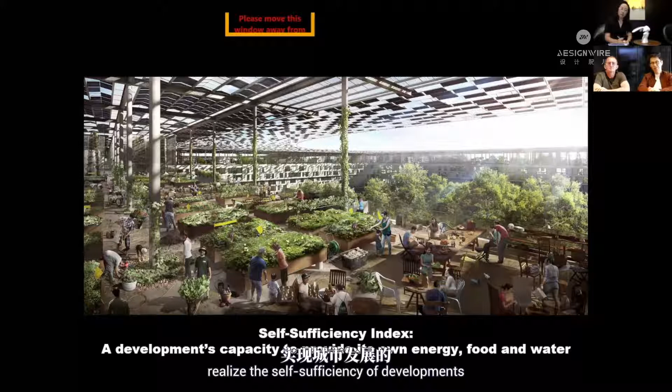And this helps us realize the self-sufficiency of our developments as well as our cities in general.

We have another concept called prototypology, which is to see every building we do as a prototype for a city of the future. We always look at it as a way where it can inform future projects, or how, if it was replicated at scale, we could have system impacts from the way it performs. So the projects we'll show you are kind of prototypes, or a rethink of a particular type of use of a building. We wanted to show this to explain what we mean by prototypes.

The first one is in Bali. It's not in a high density urban environment, but we think it's an interesting one to show our approach to rethinking a problem and reframing it in terms of systems and landscape. It's on the edge of a cliff in Bali, and the big change in this hotel is that we flipped the architecture completely from object to space - a figure ground reversal in terms of what we focus everybody's attention and experience on. You can see it as a series of outdoor spaces and landscape, just framed by the architecture.

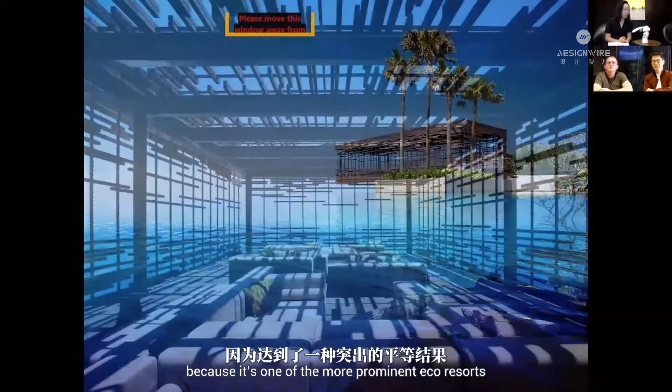As a hospitality project, we were interested in making it sustainable. When we got this project, we discussed with our clients and said the future of hospitality and luxury must be equated with sustainability. This project, from day one when it was finished, became the darling of sustainability, and it got very good publicity because it's one of the more prominent eco resorts.

It uses all local materials and recycled wood. The wood is old telephone poles and railway sleepers. The stone is all from Bali or from Java.

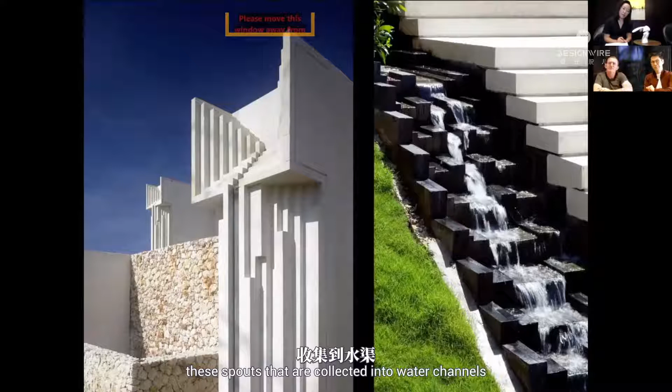But this being a very dry area in Bali, water was a crucial element in the design. We wanted to harvest and recycle as much water as possible to reuse in the development. So this is a rain garden, for instance, which stores water and then slowly releases it. These are details around the site where we celebrated the journey of water from the roof down these spouts that are collected into water channels, and then go into the recycling ponds.

This is the hotel room. You can see that as a room, it's actually really a garden, and we have very minimal separation between indoor and outdoor. But what is nice about this room type is that we encourage people to use the room in a naturally ventilated condition.

So when the hotel was open, the operators actually asked the patrons and visitors if they would like to keep the room open in the daytime, but they would only close it at night for air conditioning when they sleep. Most guests opted to have their rooms naturally ventilated in the daytime, so you can see the amount of energy savings you would have.

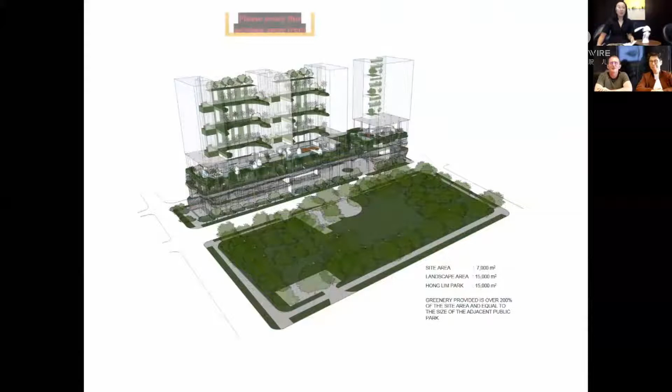It's located in Singapore in the heart of the city, but we were very interested in creating a very green and garden experience, this one being in the CBD.

So this green area that you see in front of the hotel is a piece of land that in 1876, a wealthy Chinese businessman donated as a park for the workers. This is Singapore's first and only private public park.

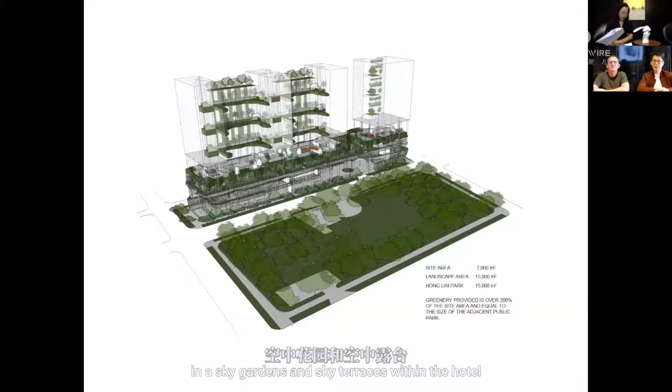When we were asked to do this project, we wanted to match the civic generosity of this philanthropist, so we created the same amount of parks as sky gardens and sky terraces within the hotel. We created over 200% of the site area in gardens within the hotel.

So you see a video clip of it, and it makes very clear that this hotel looks very different in terms of building material and finishes compared to other buildings, because it has quite a bit of integrated landscaping built into the form.

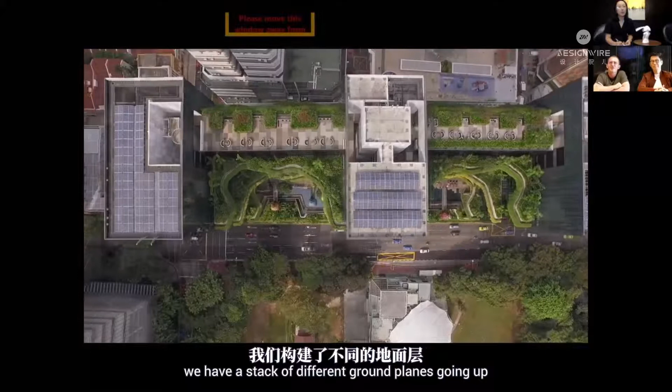The spatial design makes us feel like the building is introducing nature into itself. You can see several of our strategies here: multiple ground levels, a stack of different ground planes going up, and topographical architecture, so the building is more like a landscape than a building. The different parts appear as smaller buildings within the landscape rather than being a single object that you read as one building.

At the same time, this is for us a very high density solution, but also creating high amenity to the users.

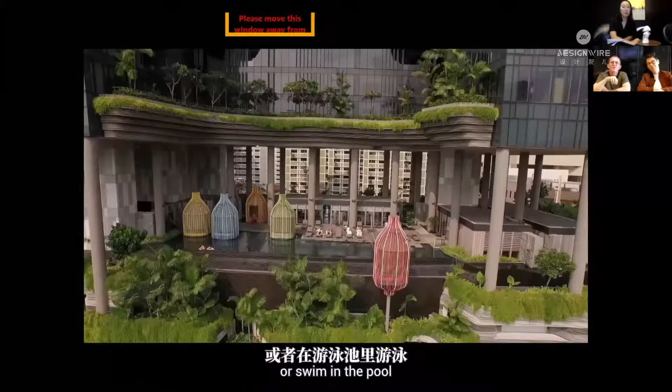I think it gives you really unique experiences in the city. Just sit in one of these pavilions or swim in the pool, you get to enjoy the city in a completely different way. What is interesting is that this building and this hotel has got a lot of attention from social media and from people, I think really because there are very domestic details within the development that people can see and relate to from the street level. So it actually gets photographed a lot.

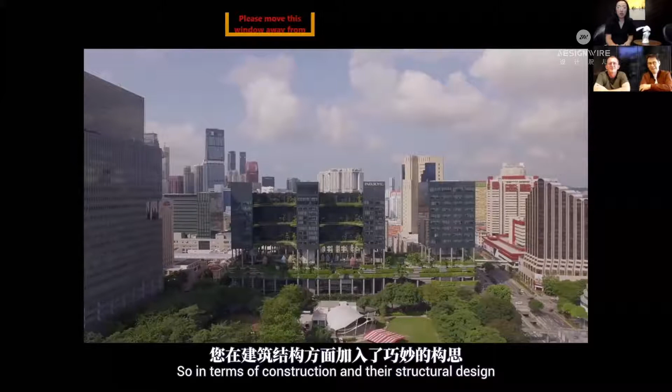So we have a question regarding this project. In terms of construction, the structural design, what is the biggest challenge in this project?

Singapore, we're not an earthquake zone, and compared to China, where you have to make the buildings very geometric and very strong, in Singapore you can be a little looser.

The biggest challenge was probably managing all the different contours of the topographic architecture, because we needed to do it in a way that was fairly buildable. So we came up with a system of regular panels and radius of curves and pieces, so with a few molds you could actually make the entire landscape form. It looks like a very different looking building and difficult to construct, but in reality it wasn't that difficult—it was a fairly straightforward kind of construction.

I think the only challenge was when the building is finished, almost everyone wanted instant gardens and instant landscaping, but it takes something like 6 months to a year for the landscaping to actually feel lush and mature. So the anxiety at the beginning was really how to get it lush and green, so it actually shows off the quality we wanted from the design.

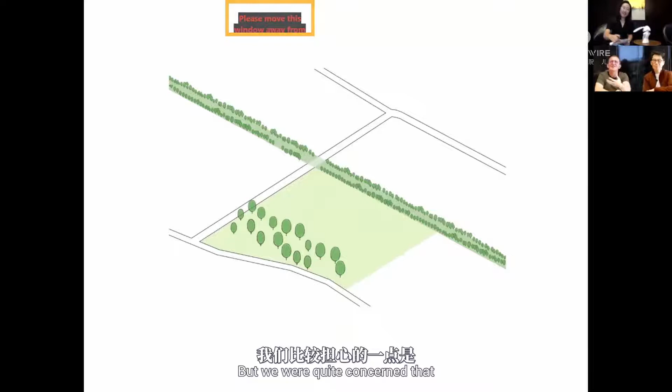The general concept was 960 apartments, which in Singapore is pretty large—maybe in Beijing it may not be that large. But we were quite concerned that we wanted to foster a sense of community, and we felt 960 apartments is too big, you'll never know your neighbours. So we were really keen to break it down, with that idea of a city within a city, or a vertical village.

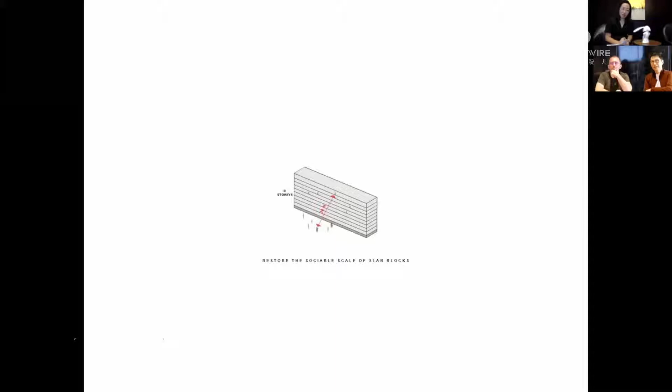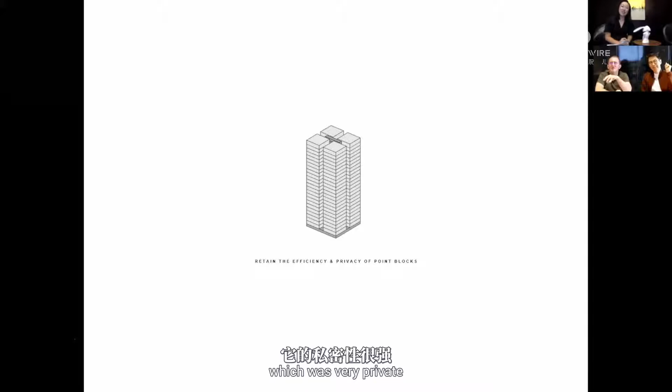The idea was we would take some aspects of old public housing which were seen as very sociable, like the old 11-story or 10-story blocks where you could see the face of your neighbor as they were walking on the ground, or you could hear someone shout from the top floor to the ground floor. The next model in Singapore from maybe the 80s was the point block, which was very private—people liked it, but there was a sense that you no longer knew anyone living in your block.

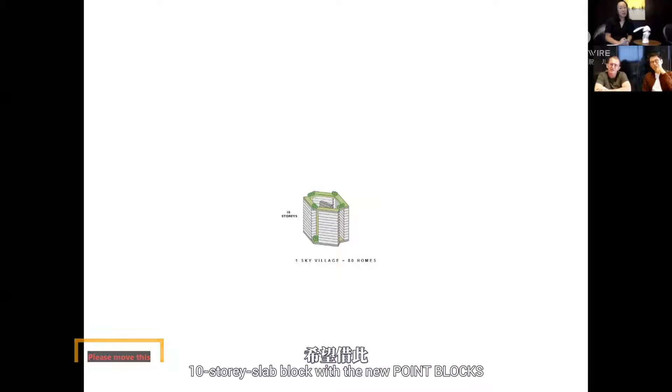At most you only know 4 neighbors within the same floor, so it wasn't such a sociable sort of idea. So we came up with this module, which was a combination of the old 10-story slab block with the new point block. We hope to create the best of sociability as well as privacy with this idea.

We put 80 of them together in one 10-story block, but the important thing was they shared a common volume. So everyone who would come in and out of the lift could look down into a common space, and if they could see their neighbor there, they could wave hello. Their kids could play together there or study there, you could walk your dog there. So it became like a village with a town square.

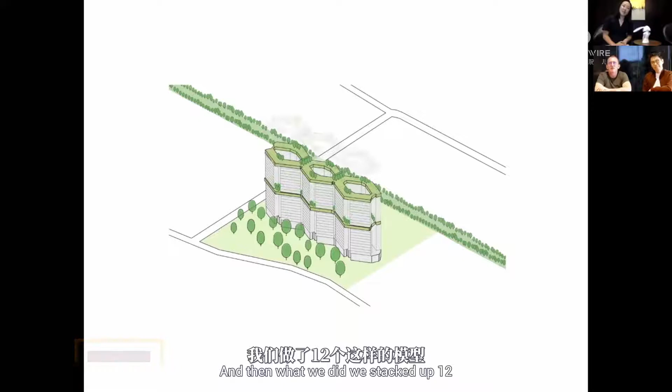We stacked up 12 of these to get our 960 apartments, and then we made a fully public park on the top as well. So in terms of even higher density, it's actually possible, it could go even higher and more connected as well. What's really nice is that within this development you have almost a 200-meter long horizontal Sky Street and Sky Park, not just one time, but almost 4 times in the building.

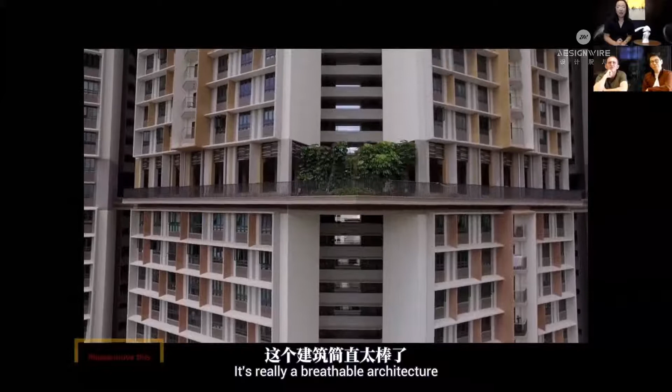It's really a breathable architecture, and the circulation in this building is infinite. Actually very good in the recent COVID pandemic as well, because within your building you don't have to leave, but you can get out of the apartment and you can exercise, and you can sit in the garden and get the sun.

So One Sky Village would share some of these spaces, which we call the Village Green and the Village Town Hall. This is a real human scale. What's really interesting too is that now this building has been finished for almost 6-7 years, we have done some post-occupation surveys, and what's interesting is that the people here do know more neighbors than other types of social housing. So this confirmed the social engineering idea we wanted is actually working well.

The university did a study, and in this block, people tended to know 10 sets of neighbors versus other blocks where they only knew 3. In this neighborhood we say hi more often than in those buildings, so people are more friendly.

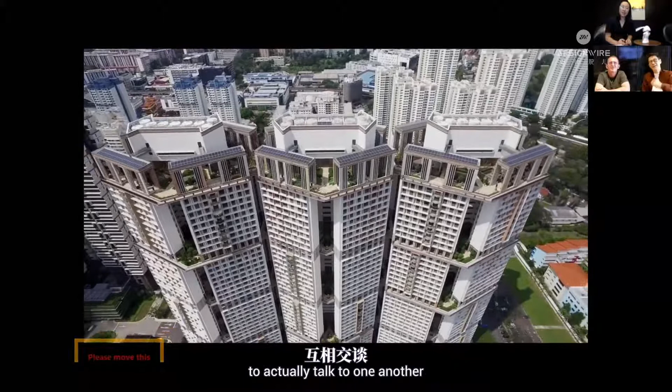I think it's because we created more opportunities for people to meet. When you use lifts, which are vertical, it's not a very social space because it's very tight and congested. But when you can actually walk horizontally in the Sky Streets and Sky Parks within the development, you start to make friends and start to actually talk to one another. I think this is the idea behind social public housing in Singapore, and life experience making architecture. Exactly, it's architecture about framing social interaction rather than just being about form.

Want to do this one?

This is an interesting one because it's a typical typology of a skyscraper. With this skyscraper, we were able to create a new typology, a tropical typology, that actually replaces the site area by more than 10 times of greenery. At the same time, we were able to create horizontal community spaces, almost the same size as the site area, within the development. So we created almost 3 sorts of community spaces that you'll see in the video clip as follows. That makes it very sociable as well.

Sorry to interrupt, Designwire published this project a few years ago, and it's been a blast. Last night, one of our fans delivered a comment saying they knew this project a long time ago, but didn't know the name. Finally, they're excited that you guys are here to present this project. We're very excited to see this project again on Designwire.

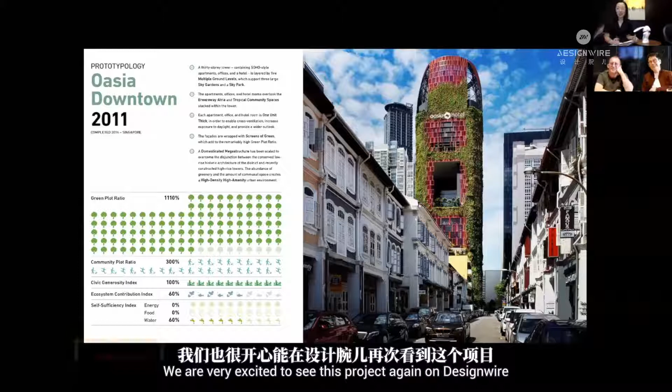This project is very unique because you can stand in the middle of the building and actually see through all 4 sides, and it's not possible in a typical skyscraper to stand in the middle because you would have the lift core there.

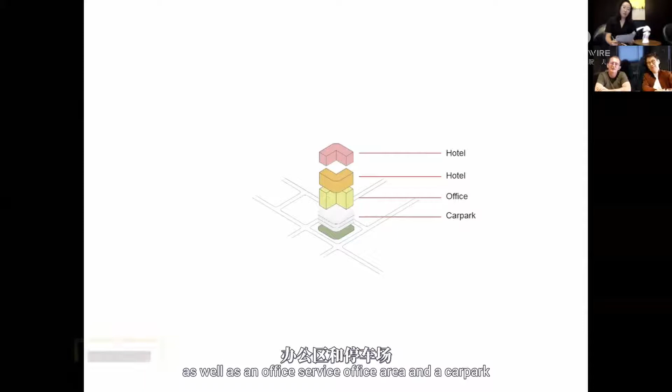So let's just show what's in the project. It's actually a mixed-use project. There are 2 different categories of hotel rooms, as well as a serviced office area and the car park.

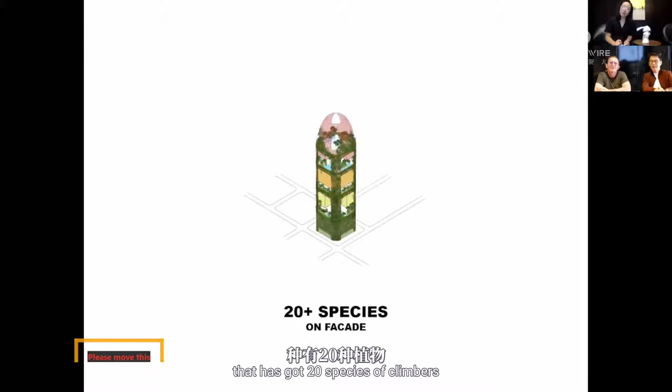And for each component, we have a sky terrace, and on each sky terrace, we have 30 species of trees and shrubs in it. And on the facade itself, we have a vertical mesh with 20 species of climbers and creepers on it.

Achieving a green plot ratio of 1,100%. We think that's a really interesting ratio because what it means is, even in a city with no green, if you put in just 1 in 10 buildings being like this, you could achieve an average of 100% across the city. But what is also interesting is that we also did some biodiversity projection on this building, an ecosystem projection.

What it actually does is, if this was a piece of lowland tropical forest, this building actually performs the ecosystem services of that forest up to about 60%. And it has the same amount of biodiversity as the neighborhood parks that are quite close to this development as well.

On this video, you can actually see the plants growing over time. And we think that's very interesting too, that it's a building that is always changing and always different. We always get comments from friends and from designers who sometimes would message us or email us, or on Instagram and social media, telling us how they enjoy seeing this building change over time.

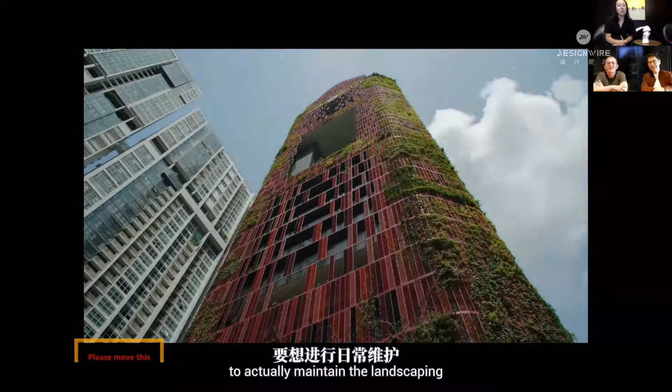Is it difficult to maintain the facade? It is really easy. You can see from this picture, the landscaping is actually at the ground level. So this is the term we like to use: multiple ground level. Ground level means that you can actually walk on it and you can actually maintain the plants at that level. So you don't need a building management unit to actually maintain the landscaping. You maintain it by walking to the planter or to the garden to actually maintain it.

So behind the mesh, there's actually walkways with the planter boxes. So it's very, very easy to get to all the plants. And what is really nice is that at the 10th floor of this building, the hotel general manager has told us that they have spotted squirrels in the mornings. Wow, in this building.

Next page. Okay, we will move on to the next project.

So this project is a very different one. It's a social mixed-use housing typology that layers on quite different uses. We have social elderly housing, a medical center, daycare facilities for both the young and the elderly. It has a very large public plaza for the community and for this entire neighborhood. We also have a retail component, but what is interesting is that it's an urban connector towards the MRT station, which is adjacent to the site.

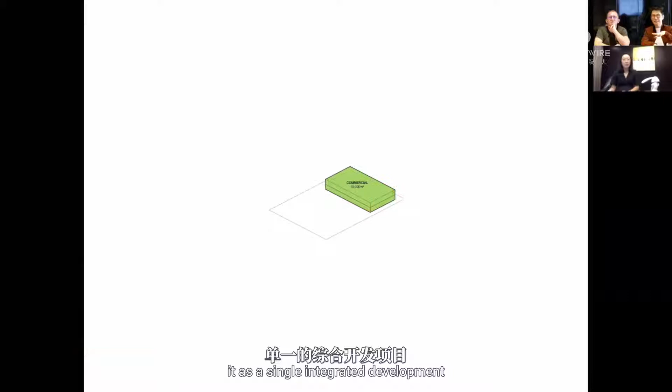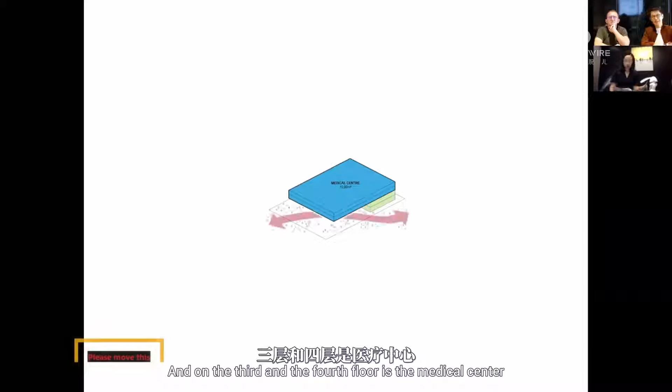So this is the site area. Normally you would have these 4 different uses as separate buildings, but we chose to interpret it as a single integrated development where on the 1st and 2nd floor we have the retail component, and on the 3rd and 4th floor is the medical center that provides shade and shelter for a covered tropical plaza space. On top of that, we have the community uses with daycare facilities for both the young and the old, and we drape it across with a sky park that becomes a semi-public park for the elderly housing.

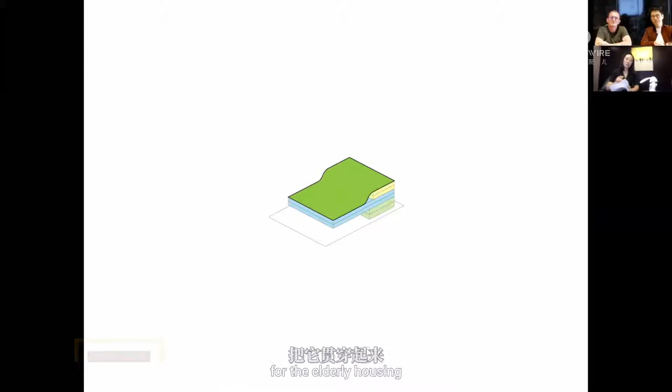So you have this elderly housing, and you can see from 6 months later a mature sky park on top of it.

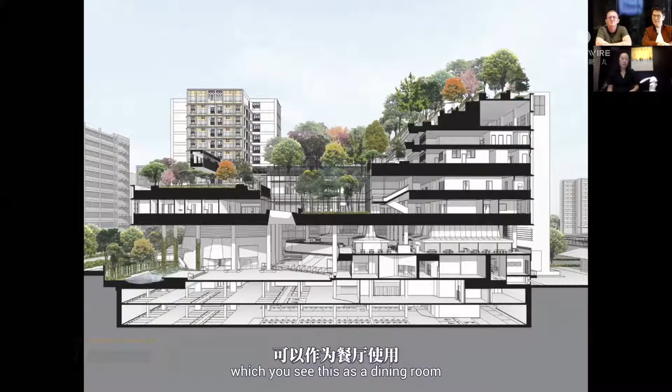So as we see from the section, what is being layered on is the basement. We have the supermarket and a public plaza on the 1st floor. The 2nd floor is a hawker center, which you can see as a community dining room. The 3rd and 4th floor is the medical center with a courtyard in the middle. And then on top, we have the social housing and the sky park.

This one has been very successful, very popular with the surrounding community. It was so popular, the Prime Minister broadcast his National Day address from the place. This is the public space, so everybody walks through here from around the district to get to the train station. And there are many exercises and events being held here by the local community.

So you have retail on the ground floor, the food court on the second floor, and it overlooks the public plaza. And the public plaza, we call it a tropical community space, can be used throughout the year, rain or shine. And this would be one of the typical studio units for the elderly.

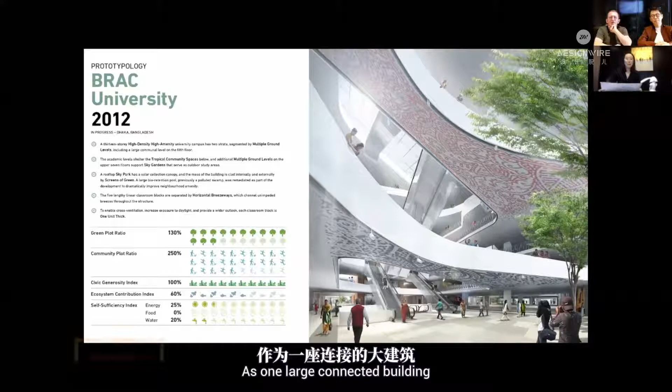This project is a university building. Well, it's an entire university actually, a new campus as one large connected building. It's located in Bangladesh, in Dhaka, for an NGO-run university.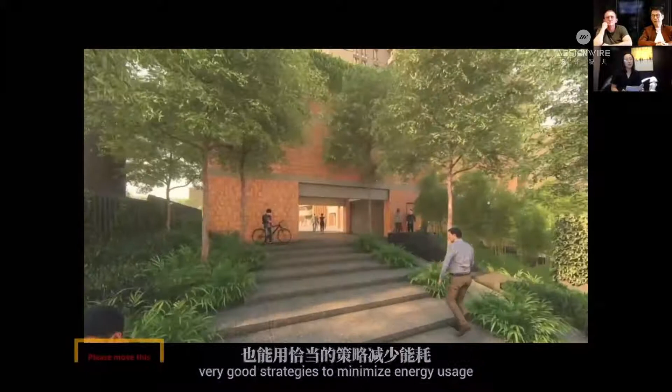What is important for us is to do the right thing in a developing and poor country and city like Bangladesh, Dhaka, and to set a good example of what good passive design is, with very good strategies to minimize energy usage, while also creating enough clean energy to power more than 60% of the energy needs of this university.

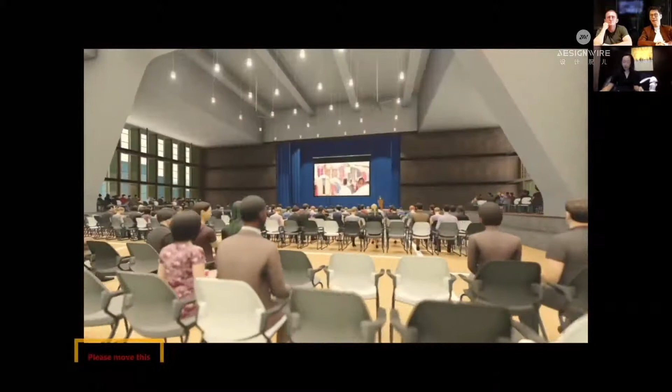It's a very compact design. It's 12 stories, with a very large solar canopy on top that provides clean energy for up to 60% of the energy needs of this university. This university would cater to about 15,000 undergraduate and postgraduate students.

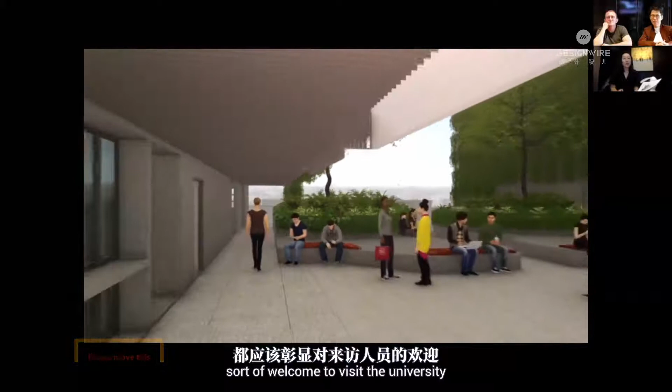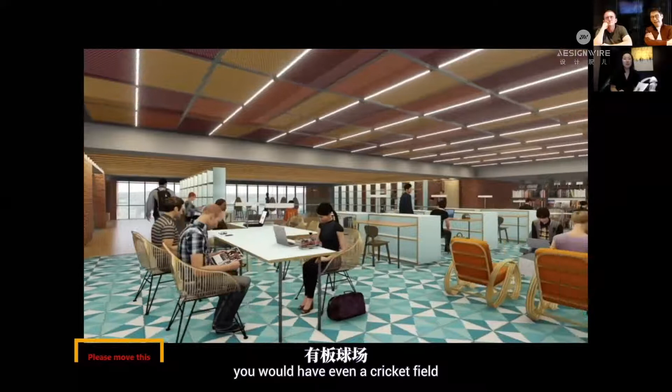On the lower levels is where the university meets the community and the public. At any time, the public would be welcome to visit the university on the lower levels, while the upper levels are a more secure academic area where students learn in interesting and inspiring spaces. On the roof, you would even have a cricket field, running track, and swimming pool.

What is interesting is that most of the social and circulation spaces are not air-conditioned. In fact, the building is designed as a wind machine, funneling the prevailing wind through breezeways to help create cross ventilation for all the one-unit-thick classrooms.

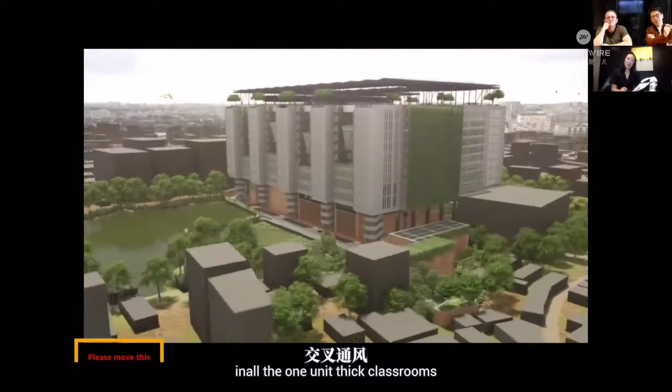It's under construction at the moment, halfway through, and hopefully will finish in about 2 years' time. I'm sure when it's built, it will be one of the greenest universities in Bangladesh. We hope so too. I think it will be a very interesting and different kind of university building in the tropics, and also a landmark. It's important for us that it becomes a catalyst for change in the city.

So this is back to Singapore again. This is our latest offering in hospitality, the Pan Pacific Hotel in Orchard, Singapore. Orchard Road is a famous tourist belt in Singapore, and a lot of the hotels there are aging. This is a redevelopment of an existing old hotel into a brand new hotel, and what's really interesting is that it creates 4 boutique hotels within one.

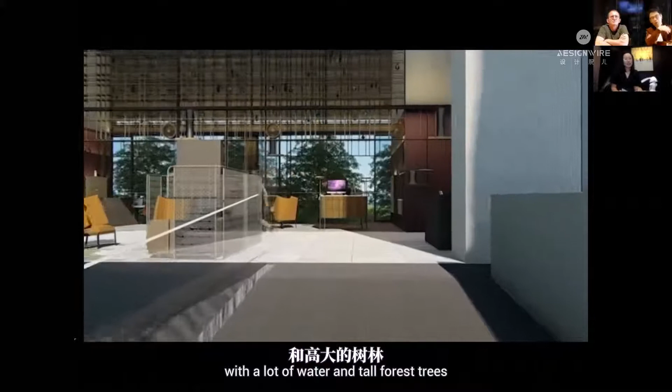We have the ground floor, which we call the Forest Terrace, where you're greeted with a lot of water and tall forest trees. It will be quite misty in the morning.

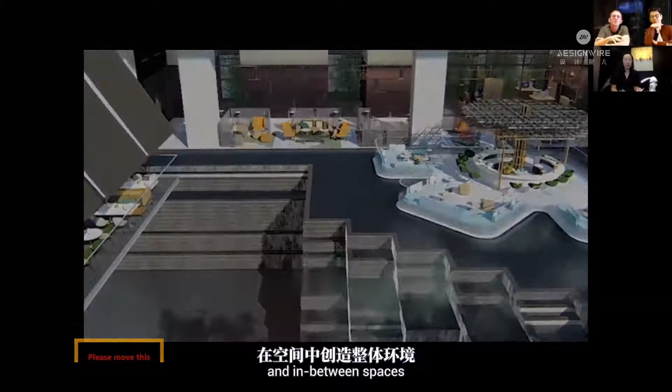So this one is again an example where we're doing architecture and interiors with the landscape concept together, creating really a total environment of indoor, outdoor, and in-between spaces. We think it's something where you have a lot more potential versus just an architectural shell and an interior core. So the second datum, which is the second boutique hotel within one, is actually bringing the beach into an urban hotel.

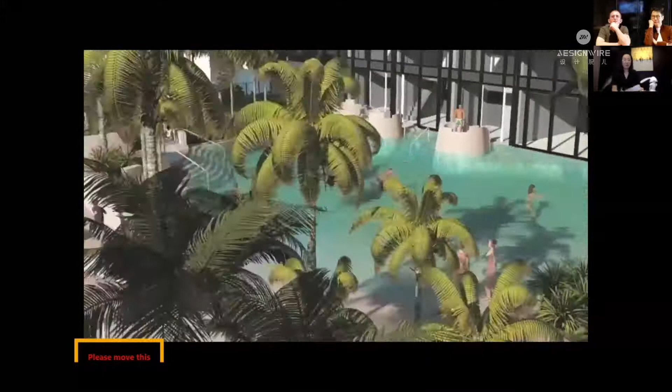So this is the beach terrace. As you zoom out of this image, you will see it's actually an elevated beach in the building. And as you go up to the next terrace, is the garden terrace.

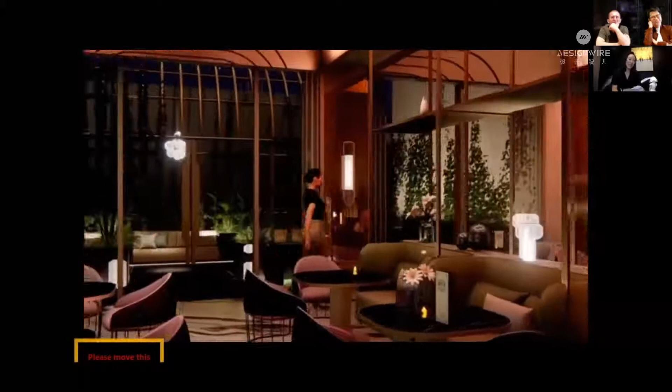Wherever you go, there's always a garden. And this one is a garden terrace where you can actually conduct business cocktail parties, event launches, fashion shows, and even have a wedding on this garden terrace. You have rooms actually looking down on this terrace, and it feels like a smaller boutique hotel within a larger hotel.

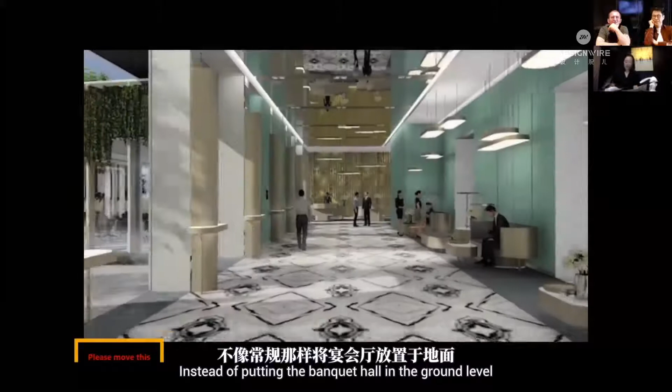And then on the very top datum, the top boutique component, we have the cloud terrace. And instead of putting the banquet hall at the ground level, we chose to put it at the top, on the clouds, so that you can have a wedding in the clouds.

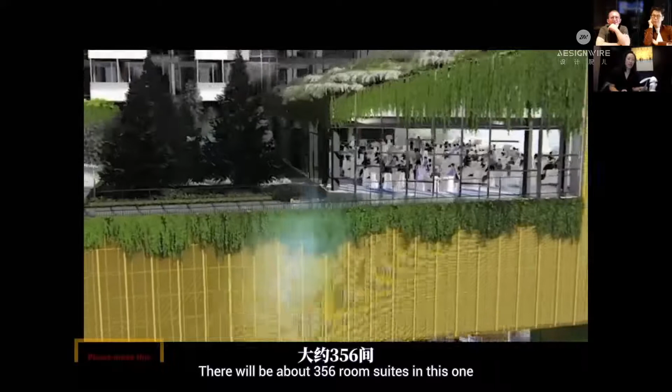Excuse me, sorry for interrupting. So how many suites are in this building? There will be about 356 room suites in this one. And about what's the average size of the room type? It's about 30 square meters. Okay, so they're not huge rooms, but that's very typical in Singapore—the room sizes are usually quite small.

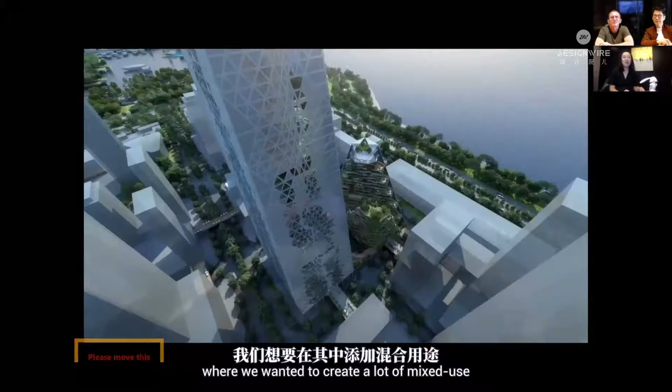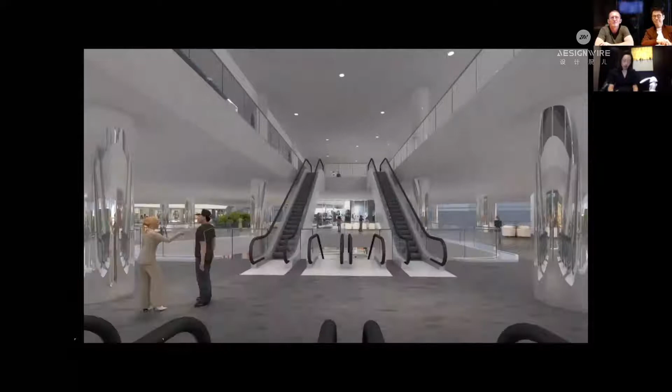The next 3 projects we will show you are some of our projects as prototypes in China. This one is an urban typology of a headquarters building, where we wanted to create a lot of mixed use within the headquarters and also infuse it with a lot of amenities. So not only would you work and live within this headquarters, you would have amenities like gyms, running tracks, swimming pools, convention spaces—very vibrant, very mixed use—so that you hardly need to travel too far away from the building, and hence you could compact the size of the ecological footprint of this building.

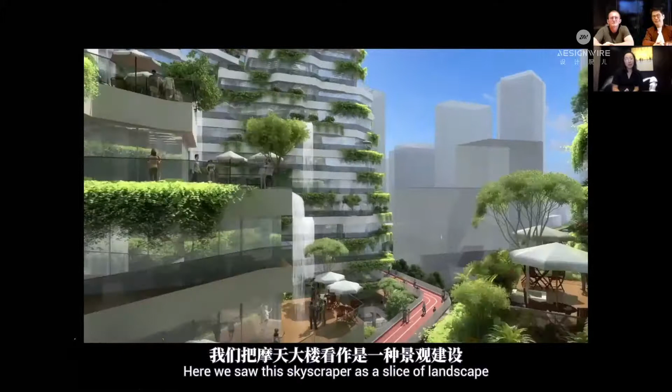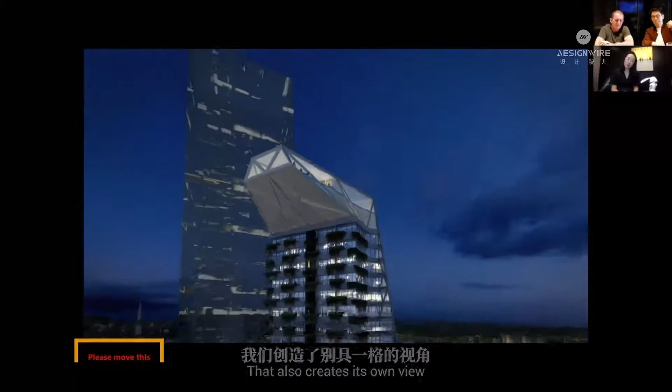And here we saw this skyscraper as a slice of landscape, where all the water is collected from the top and through remediation helps cleanse the water as it goes down to the bottom, and at the same time creates a wonderful natural biophilic quality within the development. Yet it is a very forward-thinking development that envisages flying drones, drone taxis, and drone deliveries within the building. The building also creates its own view, so rather than looking out at someone else's building, you get to look across this beautiful, romantic landscape.

Sorry, we have a question. So when you present the design to the client and they disagree with you, how do you persuade them on the design, or how do you handle a difficult design requirement? Sometimes we have some strange design requirements.

I think for us, we try to talk to clients from the user's point of view. And in this case, since this is meant to be a headquarters typology, we talk as if we are the office people, the workers within this building, and tell them what we want and expect of the office and headquarters. I think if you tell them that this is to increase productivity, to create an interesting, inspiring, and creative environment, we can be more productive and do a better job for them.

Most developers, most clients actually see this as a good and different perspective. Because otherwise it's like, the architect wants this, the client wants this—but if you can agree on what the users, the stakeholders need and want, which is good for business, then it's not so much a clash of the architect versus the client. It's more like everybody together figuring out what's the best thing to do. So we always try to find a way where we're not clashing, where the architectural idea is really closely linked to the driver behind the project, and then we find we don't get so much conflict. That's pretty convincing.

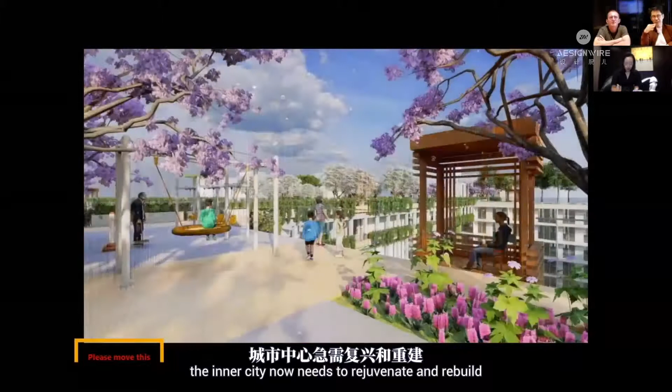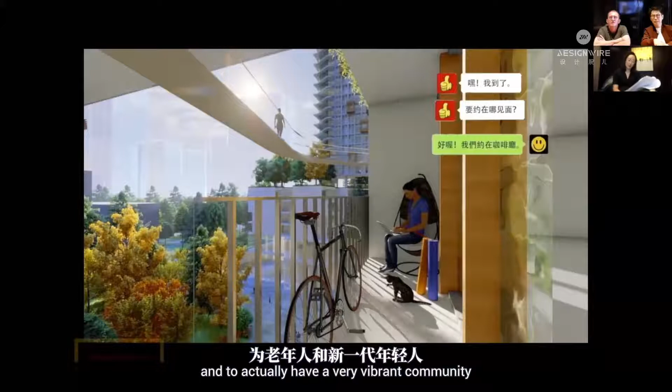The next one is a future house, a community project in Hangzhou. I think China, through the last 25 to 30 years of very fast urbanization, the inner city now needs to rejuvenate and rebuild. So this is actually a rebuilding of an inner city part of Hangzhou into a much higher density, catering to the elderly and also the young, talented community, trying to bring talents to Hangzhou and create a vibrant community of elderly and talented young people.

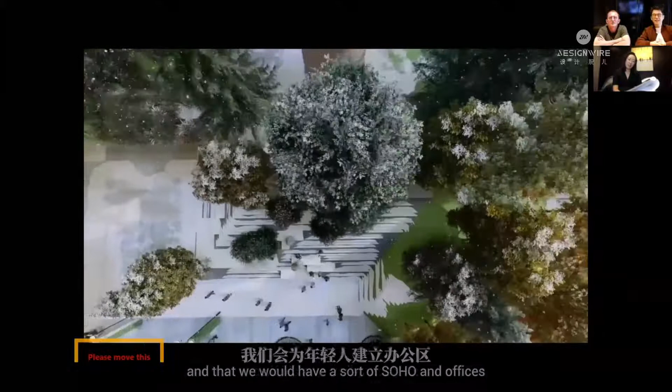We wanted the basement and ground level to be very vibrant, with mixed use, almost like a very vibrant street. We would have a sort of SoHos and offices for the talented young on the upper levels, and then right at the very top, very private and secure elderly housing for families, for young families as well as elderly.

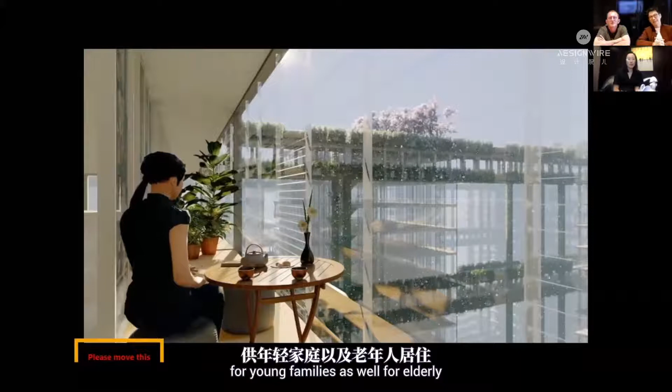This is a project where we realized that our tropical ideas have to work for temperate zones too, and we were able to create not only green gardens but also winter gardens, a four-season garden that you could enjoy greenery throughout the year. Whereas in our tropical projects it might be fully open, for a winter garden we can glaze it in and make it a sun trap.

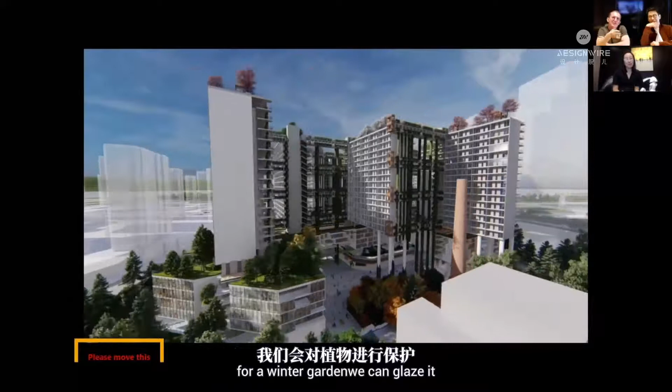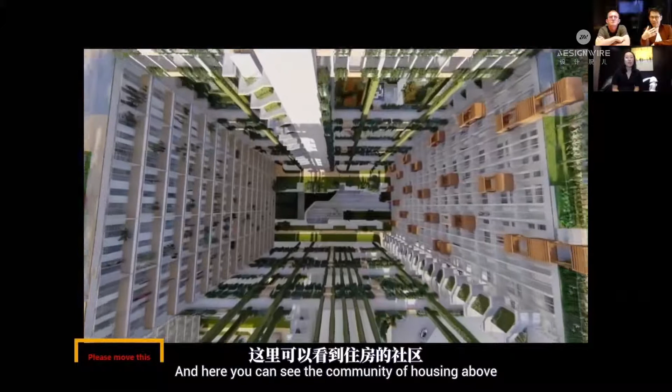Here you can see there's also conservation of very old factories, and in this case a funnel which is part of the factory. As we go into the sort of vibrant community datum, you actually see recreational spaces, retail spaces, and civic spaces all very well integrated together. And here you can see the community housing above.

What we'd like to introduce is, through all the corridors, what we call social spaces. We attach what we call mahjong cabanas, where we want to encourage the community to come and use these cabanas in a refreshing way, or to play mahjong, or have tea together. You can see there's a running track, not only on the 5th level, but also a recreational deck on the roof level.

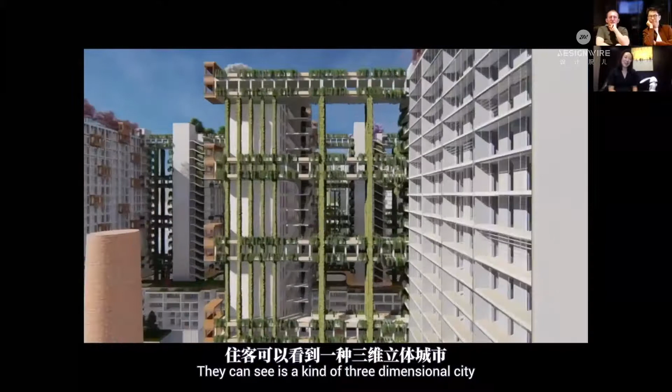So these are the winter gardens. You can see it's a kind of three-dimensional city. It's very loose and open rather than being a very compact building, but we think this is the way to treat density so it's not overwhelming or frightening, but a way you can really enjoy a three-dimensional vertical city.

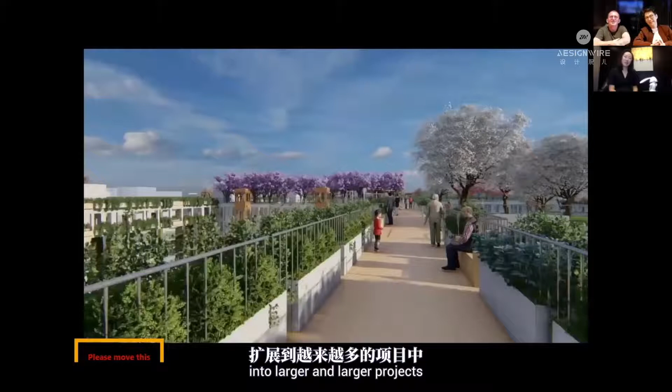I think it is becoming a reality. Yes, I think each project we finish, people see that it's possible and that it works, and so we're able to expand the idea into larger and larger projects. The rooftop is a wonderful park for the residents, and they could enjoy the views all the way to the West Lake.

I have a question. When you are incorporating landscape design in each country, do you work with a different landscape team, or do you do this yourselves?

We are very good landscape architects ourselves. We know plant materials. Because I'm from Singapore, I'm familiar with the tropics. Richard is from Perth, and he's also very familiar with landscaping in a different climate. So together, we kind of know plants around the world.

We do a lot of gardening, so we understand the needs of plants. I think many architects don't have green thumbs, or they don't understand how much light plants need to survive, for instance. So we're quite sensitive that plants are living beings—they eat sunlight, they can't take strong winds. You really have to see the plants as your end users, your clients, and give them a home that they like.

You can't just stuff green anywhere in the project. The plants need to live comfortably on your buildings. Yes, they all generally do very well, because we understand plants very well, and like Richard says, we think the plants are also the end users, and animals too.

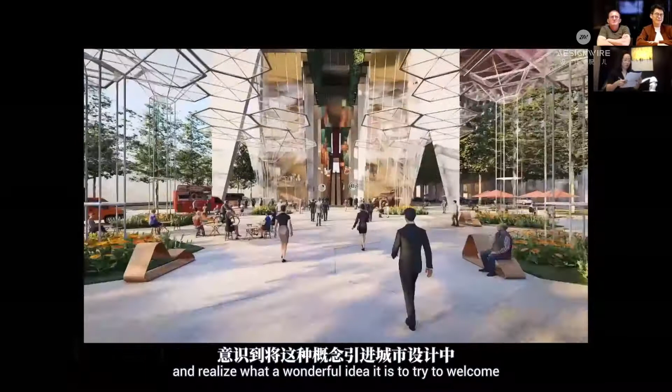This project, the Vertical Talent City, is very unique and peculiar to China. But I think the rest of the world will probably look at it and realize what a wonderful idea it is to welcome talents into your city, roll out the red carpet, and bring them back, or nurture these talented people so that they can flourish within the city. This Vertical Talent City spans over two plots of land.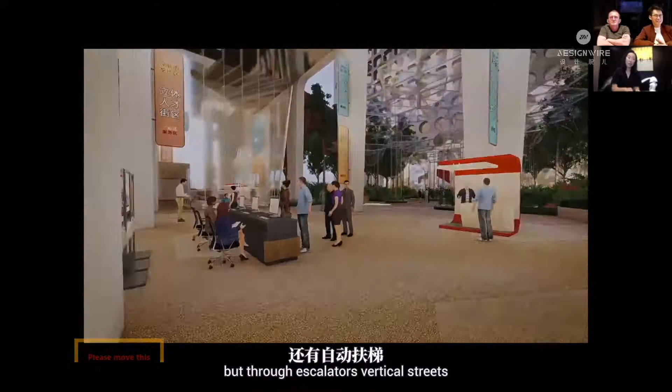We've created, not through lifts but through escalators, vertical streets and horizontal streets within the development that emphasize social awareness among people. You can see this video going through the escalators and through the streets.

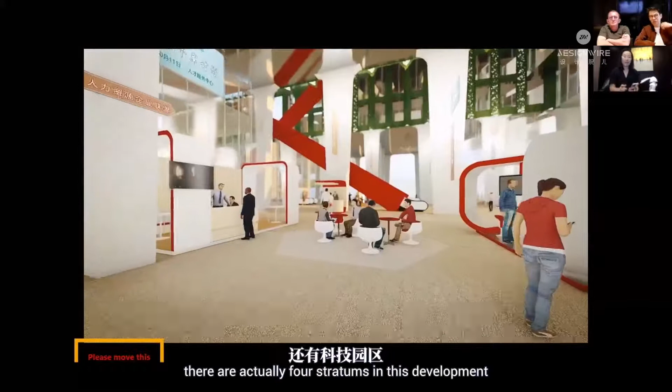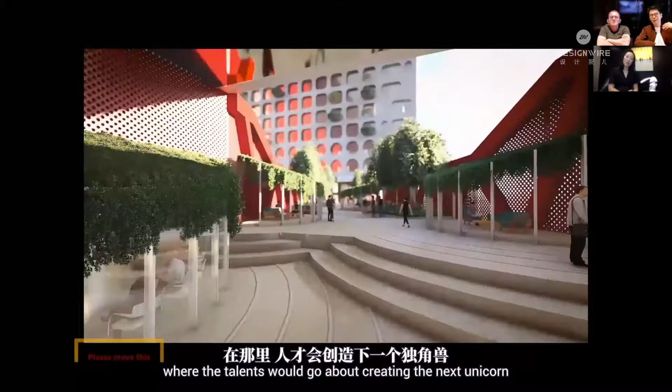There are actually four stratums in this development: the talent park, where talents are welcomed and introduced into the city; the learning and training campus; and then the incubation hub, where talents go about creating or spotting the next unicorn, meeting business and community. Once they are ready, they create their own companies elsewhere.

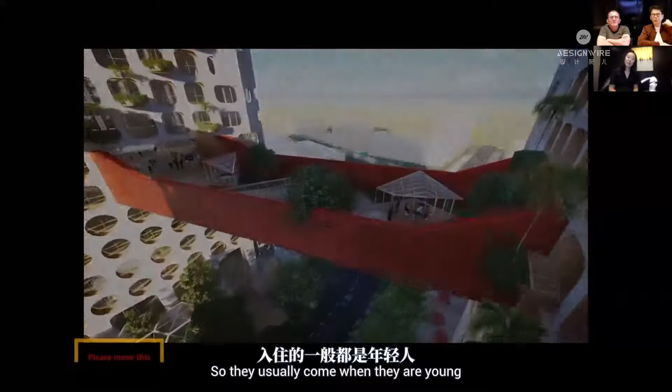The top datum and stratum is the smart community, where we have housing for the talented community. They usually come when young, with young children as a young family, and stay here for a couple of years before becoming more successful and moving out of this city. You can see it has its own social spaces, recreational and community spaces.

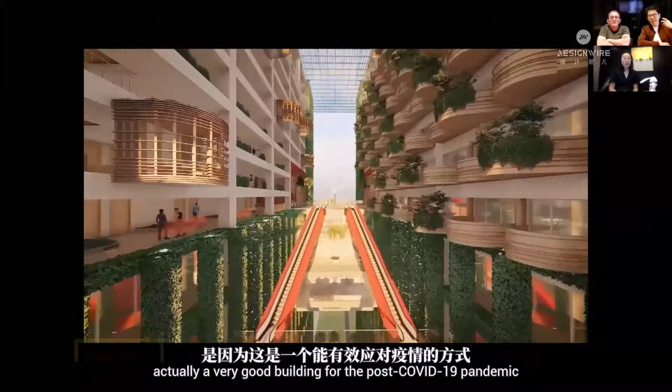This is a building we wanted to show because we think it's actually very good for the post-COVID-19 pandemic, where it doesn't use lifts as much as staircases and escalators. We are not in a congested environment or congested space, and it relies just on horizontal and inclined movement for circulation in this building.

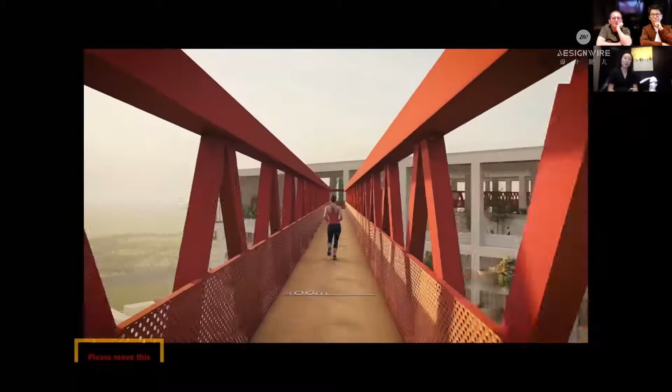We have just two more projects to show you, both Singapore projects. This is the Singapore Pavilion at the World Expo Dubai, supposed to happen this year but most likely next year. This project is about creating an oasis in a desert, a man-made ecosystem that is self-sufficient by itself.

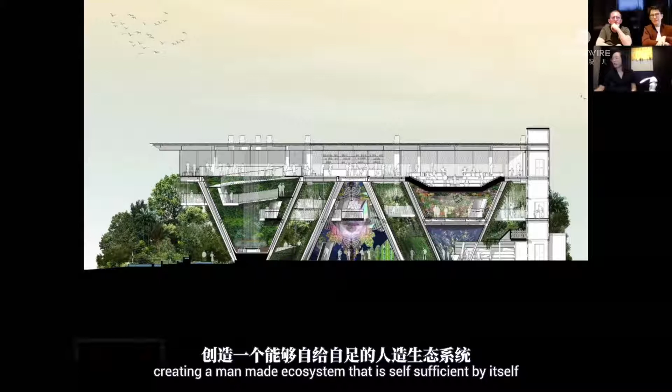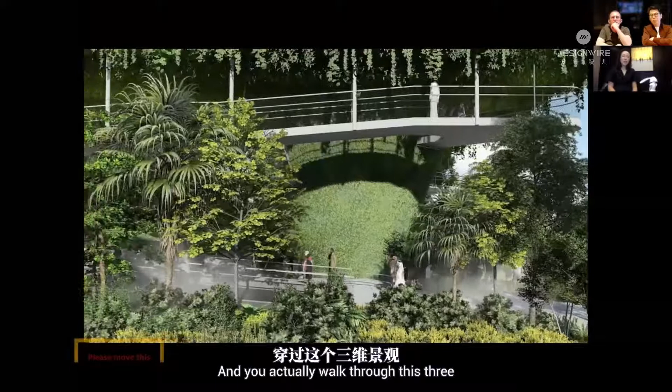It has a roof that is fully solar photovoltaic, creating self-sufficient energy for the pavilion, and also used to desalinate groundwater for use in the building. So we created a three-dimensional garden: the floor, the walls, and ceiling are integrated landscaping, and you actually walk through this three-dimensional landscape to the very top level where communication happens between visitors and the host.

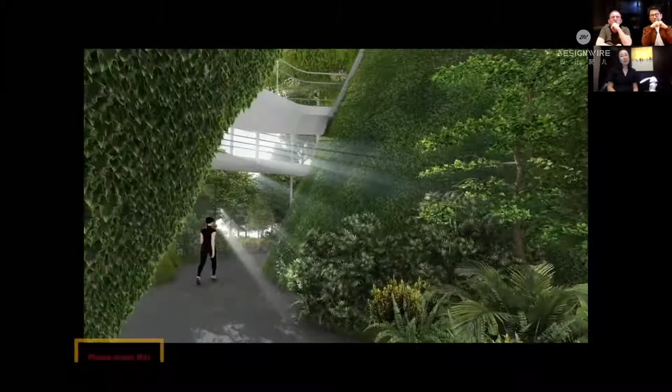At this top level you get a very good view of the surrounding, and we call this the sky market, where you're able to communicate with people. This is what we're used to seeing in the tropics, but we are doing it as a zero energy pavilion in a desert.

I can imagine the amount of oxygen here.

Yes, I think that the actual experience of the air will give people in the desert a taste of the tropical air. This is the last project that we'll show you.

This is a project we've just recently been awarded, to build an outdoor performance stage as well as a national landmark that houses the National Service Gallery in the heart of Singapore in Marina Bay. The important thing for our winning entry was to layer onto the URA's master plan a very strong landmark, a venue that counters the promontory on the other side of the bay, completing the axis set up by URA.

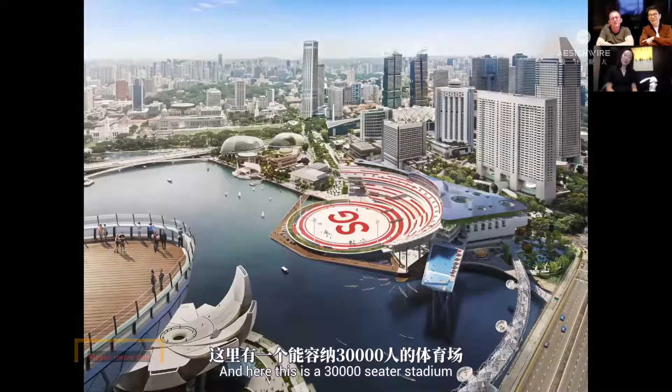This is a 30,000-seater stadium, and there's also a National Service Gallery and lots of sports and community uses. Here you can see there's a flying swimming pool, a restaurant, and sea sports amenities.

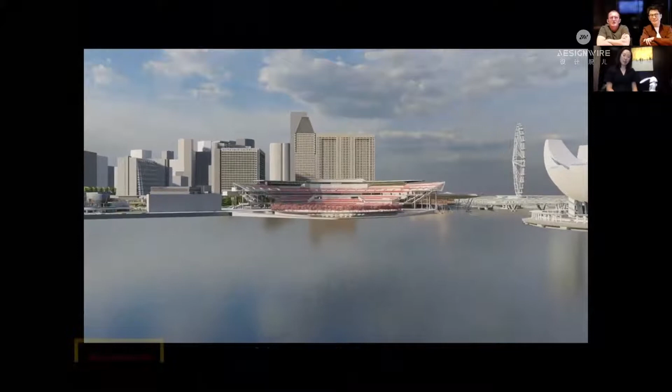Here it emphasizes the Marina Bay axis. It's a multi-purpose arena where all kinds of events can happen, designed together with Populous. It really completes Singapore's Marina Bay, which is right in the heart of the CBD.

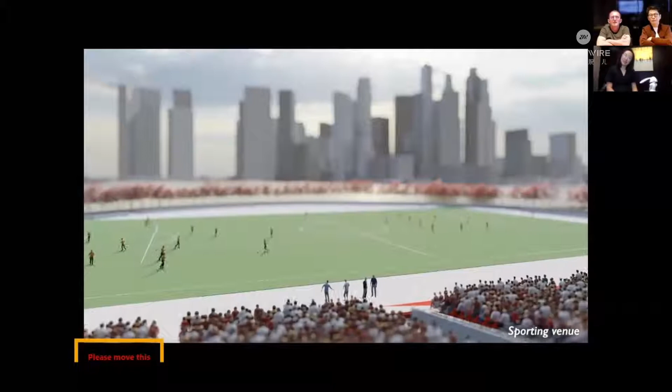So, okay, I think that's the end of our presentation. Shall we stop sharing and come back to it?

Thank you for walking us through your stunning projects — there are lots of comments from our group chat, so we've selected 3 questions for you. The first one: one of our fans said WOHA projects always deeply attracted me. I'm an interior design student from Lasalle College of Art in Singapore. WOHA projects let humans connect with humans and nature, also bringing nature in, using sustainable materials. This year we are facing an epidemic — could you have a new perspective and design direction for future architecture?